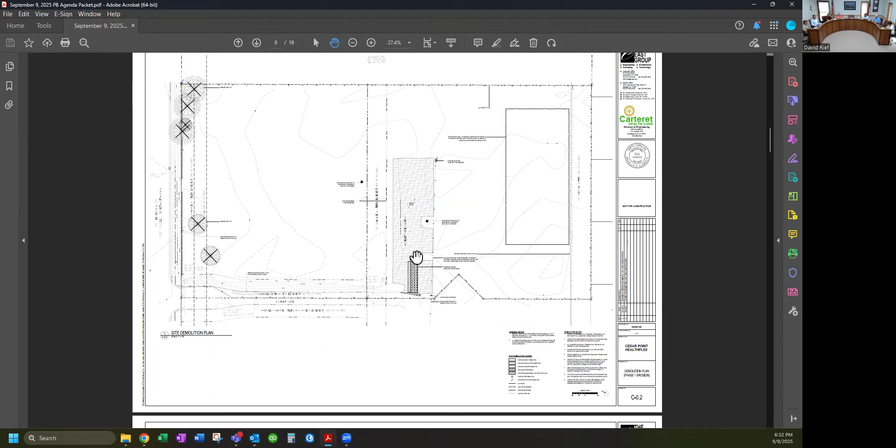Within your packet there are several pages to this site plan. The first is the demolition plan showing everything that needs to be taken out of the property. Much of this has already been done. If you've been by there recently, you'll know the trees are gone, and the whole parking area is gone, that sort of stuff.

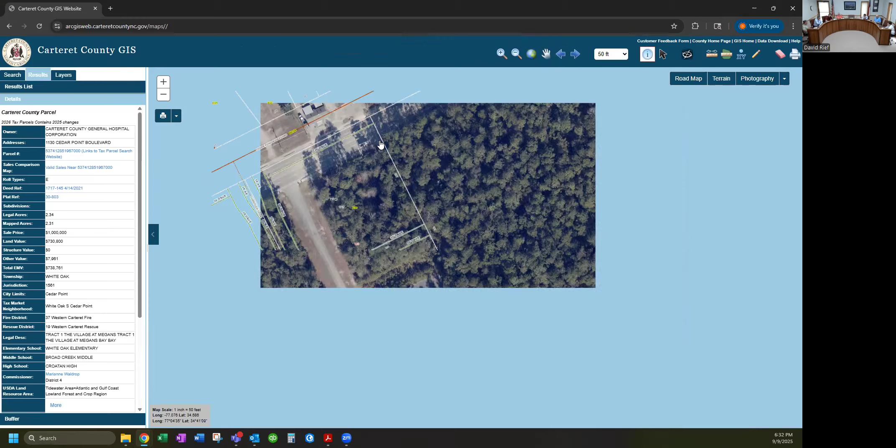The next sheet is basically a general layout of the site. Let me give you a little more context, just to make sure everybody's on the same page, and you might be watching the video at a later date. Let me set a little context here for you. I know all of you here know where it'll be located, but I want to make sure everybody can understand.

So this is Cedar Point Boulevard. Off to the left side of the screen here is AutoZone. The Town Hall we're sitting in is located right here. Across the road, kind of beside the condos, the Villas at Megan's Bay, encompassing these three tracts of land—this one and then these two behind it—for a total of approximately 5 acres.

So when we're looking at the site plan, we're looking at these three tracts combined together. The hospital does own this tract beside it, but there's no proposal you're looking at tonight to address anything on this tract over here. Everybody following? So it's these three tracts combined. But that has been cleared. It has been cleared, yes.

So we'll refer to this property jointly as 1130 Cedar Point Boulevard, even though there are addresses for 500 and 600 Lighthouse Lane back here. But the address will be 1130 Cedar Point Boulevard.

On this particular drawing, this is dealing more with your erosion control, your stormwater type stuff. You have some grading showing these parking spaces out front and along the back as being pervious surfaces, helping to reduce some of the impact from a stormwater standpoint.

Along the left-hand side of the screen is Highway 24, just to help get you oriented. Then down on the south side, the lower side of the screen, is Currituck Drive. Put that in perspective over here—Currituck's right here. The property to the west is currently still vacant, right there on the other side of Currituck. So that would be in this general area right here, with the condos being located back here.

Along the rear of the property are some single-family residential lots that are part of the Megan's Bay subdivision. I'll go on down here. This actually gives you the elevations for the grading, what those final grades would be, showing where the stormwater would be going. I can zoom in and show you a little bit more of those details here.

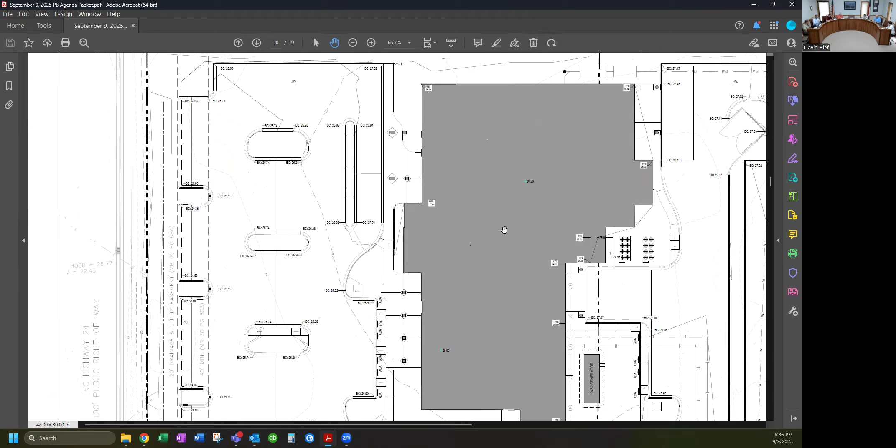So it looks like the bulk of the stormwater will be heading to the west side of the property. There appears to be a stormwater retention pond located here, as well as one on the front corner, and a little bit along this front of the property here. You'll notice that the grading actually drains things to these drop inlets on either side here, and then into these areas here.

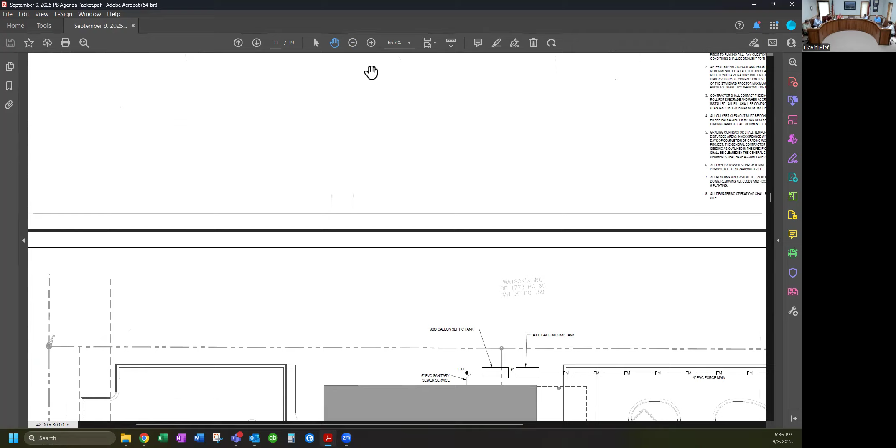Do any of these link into the drainage thing on the road? Yes, that's what I thought they did, but I just never. The state stormwater permits require a certain amount of retention on site. That used to be the first 1.5 inches in a 24-hour period, and I think it's still the same. After that, it can overflow into some other stormwater conveyance, such as a state DOT ditch. But the first 1.5 inches is generally the requirement.

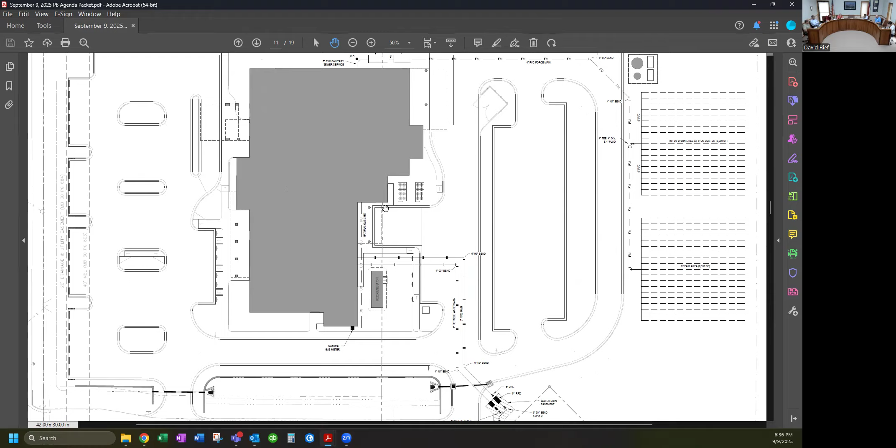One thing you see on this one is the layout of the location of the septic system. It'll be towards the rear of the property, and behind that there's a natural 30-foot buffer that's been maintained since they cleared the lot, so it's already in place. That was part of the PUD design when it was laid out to be commercial out front and condos in the back. They designed it with a 30-foot natural vegetative buffer to protect the single-family lots behind it, so that has been preserved by the hospital. I believe some of the residents might have done some clearing into that area previously, so there are some vacant spots in there now, but the hospital has taken no action to clear any of those trees out.

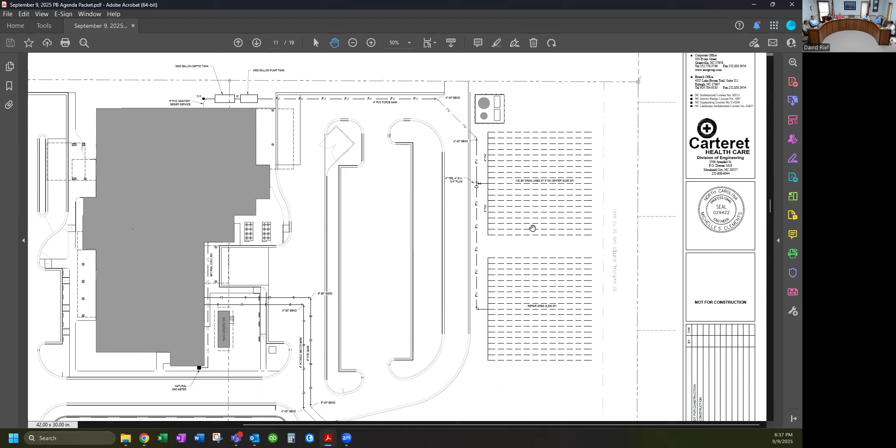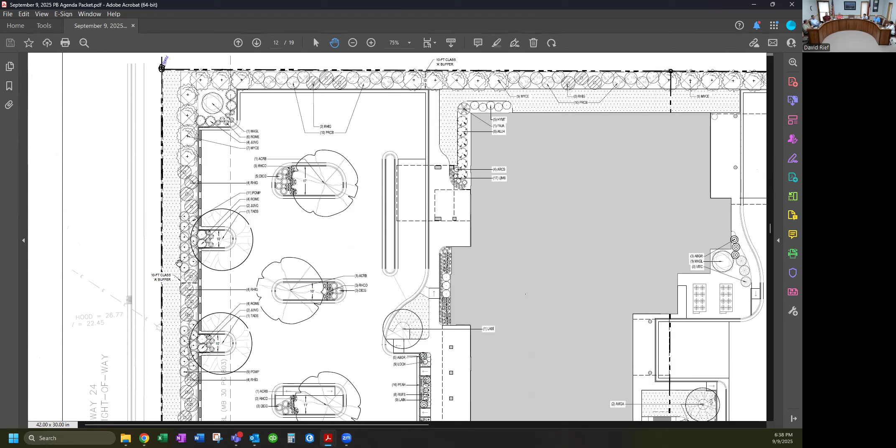It has to be a minimum of 15 feet in width. If I zoom in, this front area is actually 20 feet in width. They have all their plants in roughly 10 feet of it, with the front 10 feet being grass. If you look at our description of street yard landscaping, it includes grass as part of that, so it's not a problem for it to be grass. It does say at least 50% of it has to be trees and bushes, so of 15 feet, they're using 10 of it solidly for trees and bushes - that's 2/3 of it. So they're certainly meeting that requirement; we just need to change some of those bushes to trees.

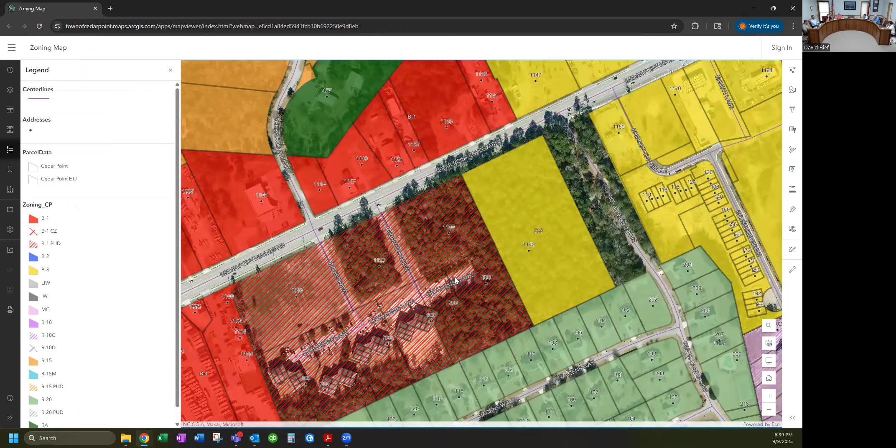There is a 10-foot wide Class A buffer along the east side of the property. Even though the hospital does own that tract of land, if you take a look at our zoning map - which I'm pulling up here on the screen - you see the three tracts here in the middle. To the east side of the property, it adjoins a B3 zoned parcel. So even though the hospital also owns it, it is zoned separately, and therefore they have to put that buffer in there, just in the event they decide to sell it or some other use goes in there. They still maintain the buffer to the right of that, going into the right-of-way of Megan's Bay.

To the right of that B3? Nothing is being addressed at this point on that side, but that's cleared, so they left - I believe they may have cleared all the way to the property line, I don't know for sure. I walked it today, it looked... but if you look here, all of this that's not shown in yellow is actually part of the right-of-way entrance to Megan's Bay. So I don't know to what extent they left anything on their side of that property line, but Megan's Bay has some wooded area.

I don't know, Kyle Merrick is the CEO of Carteret Health Care, he's here with us tonight. I don't know if he has the answer to that question. Not 100%, I'd have to go out and look at it.

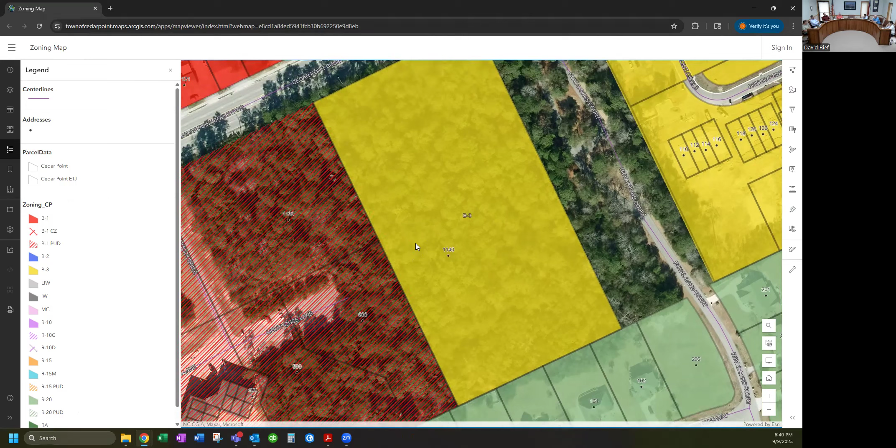Well, there's a buffer there, I just didn't know the distance, but it's not being developed yet. We'll have to take a look at that when and if they ever decide to move forward with something there - it'll be treated separately. But because they are zoned separately, that's why you have the requirement for the Class A buffer along that side, which is 10 foot.

Let's see, it gives you the schedule here. I do want to address one thing. Let me go back up to the chart.

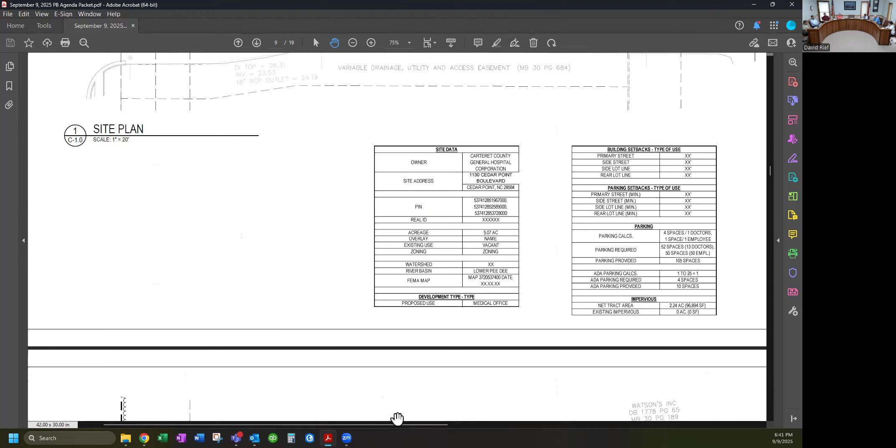One thing we always have to take a look at is the concern with parking. If you look at the parking chart, there's two ways you can look at parking under our ordinances, and this is one of those areas that could be in conflict. The parking requirements for a medical facility are greater than those for a hospital, because under our ordinances, the language for a hospital counts the number of inpatient beds to figure parking. This facility will not have any inpatient beds, so it wouldn't require parking for those, but it then has an additional amount based on the number of doctors. So the more restrictive here would be the medical facility, which is exactly what they followed for this project.

They're showing that 102 spaces would be required based on 13 doctors and 50 employees, because for a medical facility it requires 4 spaces per doctor plus 1 space per employee. So 102 required, and they're providing 105 spaces. They're also providing more ADA accessible parking spaces than required.

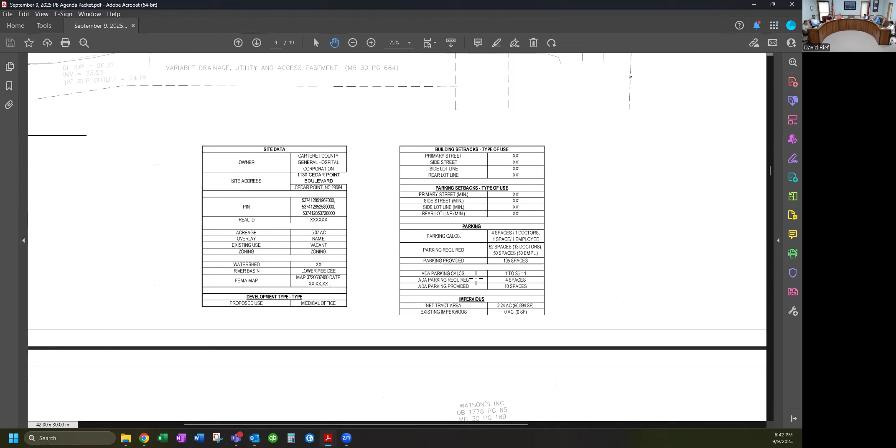So here's your general layout. My understanding is that the design is for the general public to use the front parking area, while the rear parking area would be reserved for employees and staff.

You do have a dumpster enclosure back here. It is shown to be screened, as required by ordinances.

Last month, to give you an update, the Board of Commissioners did approve the 2 text amendments that were recommended, including the language to limit it to emergency medical facilities. So the driveway location is not an issue, nor are the canopies on the front of the building.

Do you have a question?

Planting, back to the planting. I'm trying to picture the trees in the back where the staff parks. Is that road behind the trees or in front of the trees, the back road? In other words, are the trees between the road and the septic, or in?

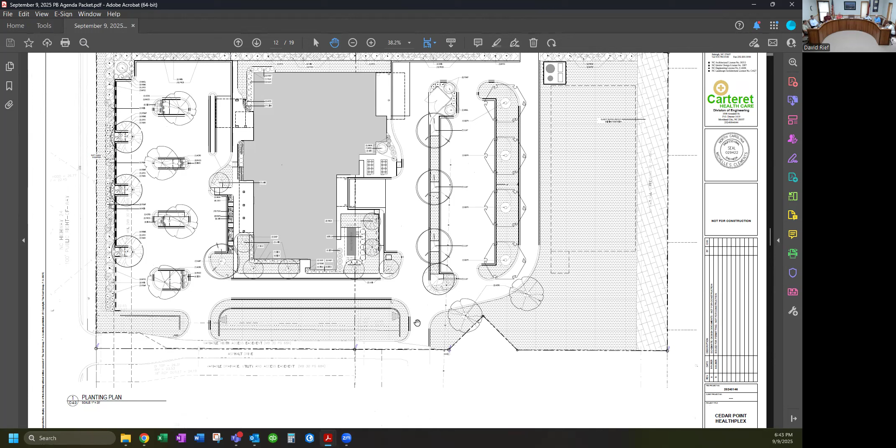So what you have here, there's a driveway entrance right here, which would line up with Lighthouse Lane, coming straight in. And then you have where an ambulance could pull in under the rear shelter, the rear canopy. And then you have parking located between these two sets of trees. Our ordinances also require interconnectivity between adjoining commercial properties, so this is a drive aisle that would allow future access into the adjoining property if necessary to meet that requirement.

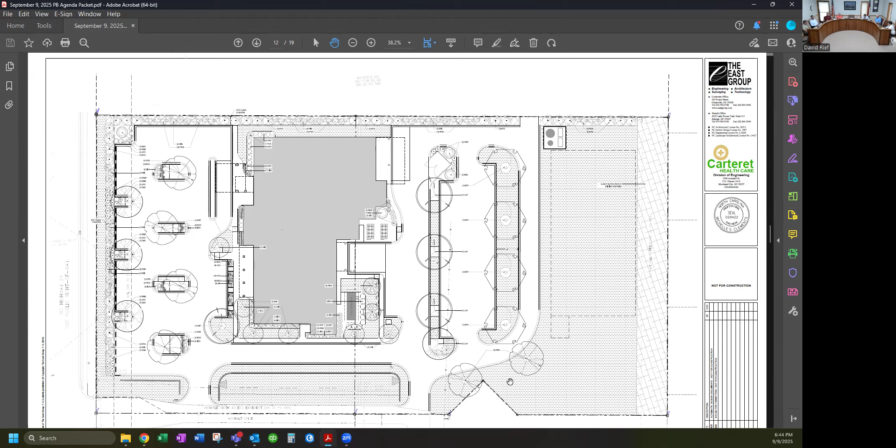So there would be a little bit of drive aisle. You may have traffic coming around the backside of that, but the parking itself is located here in the middle, as shown on your parking layout.

So there's all those parking spaces, and then you do have some parking up along the building itself. The ADA accessible parking spaces are here and on the front of the building right here. That's kind of an overview of it.

The only thing I noticed that doesn't quite conform to the ordinances is that issue of the landscaping, and the hospital has already indicated a willingness to fix that before getting final approval.

Well, nice to have public here. Let's open it up for any public comments. Those of you who are public—anybody? Okay, well then I'll start.

Brad? Good, Joe? One thing I didn't see in here—I don't know, I seem to recall most site plans include lighting, a lighting plan. That was a concern for some of the neighbors in Megan's Bay. I don't see that here. I don't know, is that a requirement for a site plan? But even if it's not, I think it would be beneficial for the Board of Commissioners to see the lighting plan.

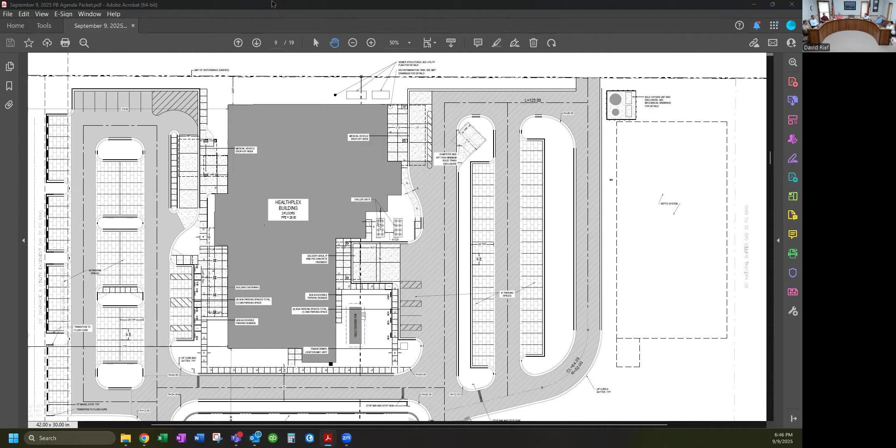And then the other thing—we saw renderings last month. There's not a building elevation. Or is there? So they did provide one, and the only question is probably building height, because that was another concern, how tall the building is. So let me pull up—Kyle, I might need you to address this. Has there been any changes to the elevation drawings since what was submitted the previous month? So there's no changes there.

As far as the height is concerned, we don't have that height. It hasn't been provided, but I do want to show you in our ordinances—getting to it on another screen here, so just bear with me a second. No, it's in the definition section.

So under our definitions, here's the definition of building height. For purposes of this ordinance, height of building shall be measured from the existing grade elevation prior to any land disturbing activities. Fill shall only be allowed under the restrictions. This tells us how building height shall be calculated.

And then under subsection C... where is it? Oh, here we go. Height limitations shall not apply to any grain elevators used in connection with a legally recognized bona fide farm operation, government buildings, schools, hospitals, water towers, public utilities, or similar structures, provided such structures meet the required North Carolina building codes.

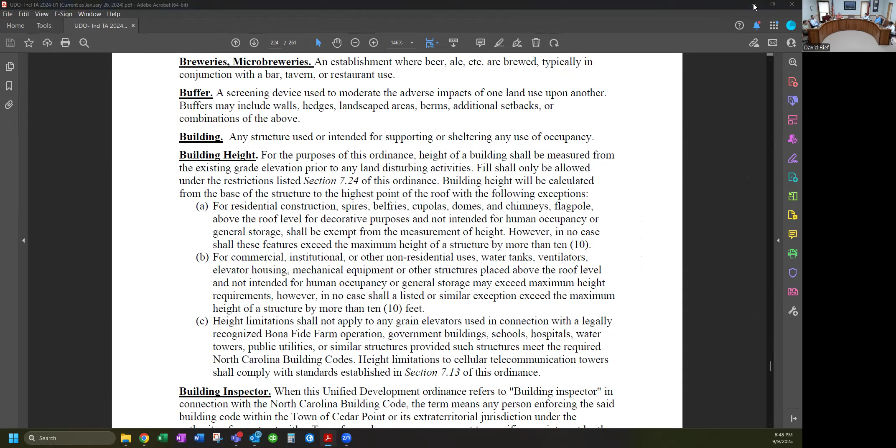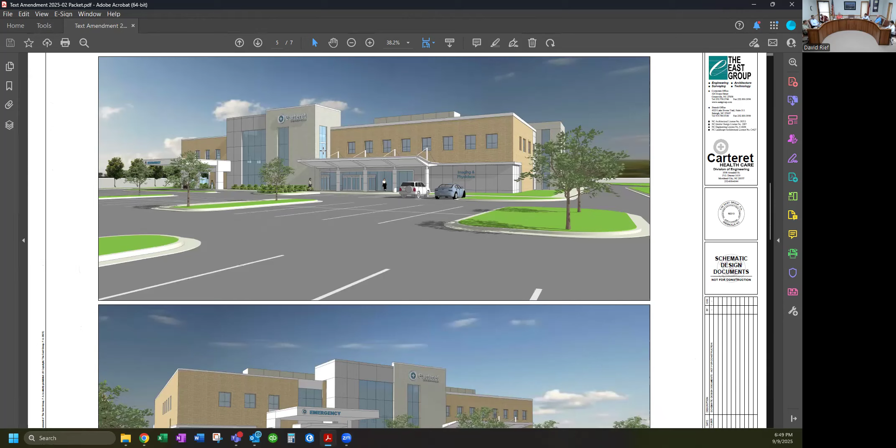I don't have any other questions.

No, Mike? Yes. So last month we had very good comments from Megan's Bay residents. I appreciated them coming out to help provide a perspective from their point of view, having to look at this building. But I've got several questions.

So it's Kyle, the CEO, correct? Yes, sir. So for you, why name the building Healthplex instead of a hospital? What's the technical difference in the definition? Because there's got to be a difference, and I'm curious what that is. So because there's not any inpatient beds, it's not deemed a hospital. So it's going to have multiple entities in there, both an MRI with Eastern Radiology, which is called CHO Imaging, and an ambulatory surgery center, which is strictly outpatient. No overnight stays. It's more or less the difference between state regulations and definitions and our ordinance definition.

I just want to make it clear so that we're not having our own assumptions in our minds. I appreciate that. Yes, sir. The clarification, a comment.

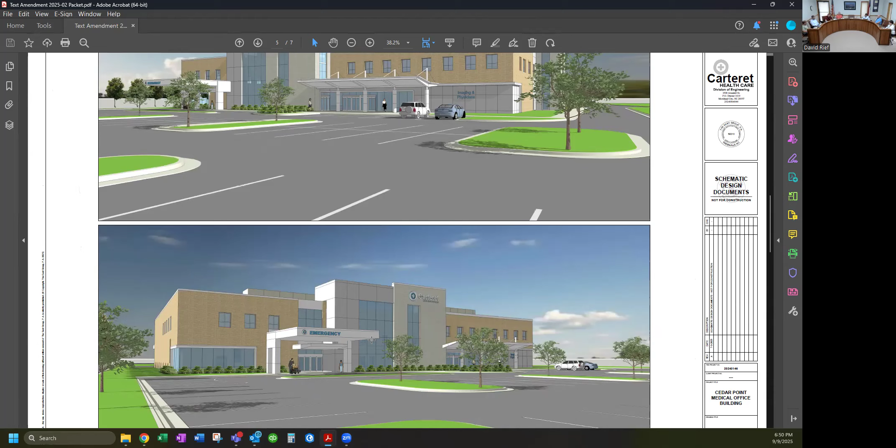I like the types of vegetation that is being proposed. I like the tree selections, because I am not a fan of Leyland cypresses. To me, that's a cop out when I see it being put in. It's just a general comment you've heard me say in the past about Leyland cypresses. When I hear them say Leyland cypresses, I laugh to myself.

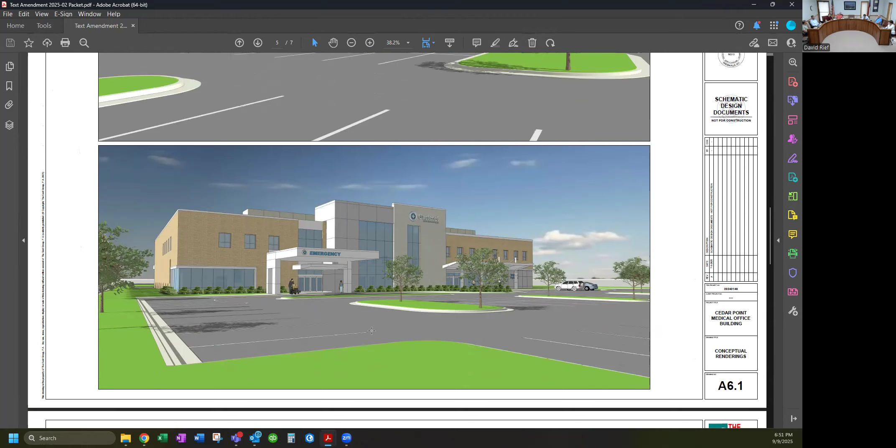So with the 30-foot vegetative barrier on the backside of the Healthplex, aligning up next to Megan's Bay - one of the comments from Megan's Bay residents was a fence. I don't see it depicted. When will that be depicted? Because that is something those residents want - a separate physical barrier, not just a vegetative barrier. What are your thoughts on that and feedback from them?

It's definitely something we can look into. It's not a definite no or anything like that. It's something we can consider. So they want a fence, it's just concern with that boundary. I share that with you. Have you heard the comments, or has David provided you with their feedback? Yes, sir. Okay.

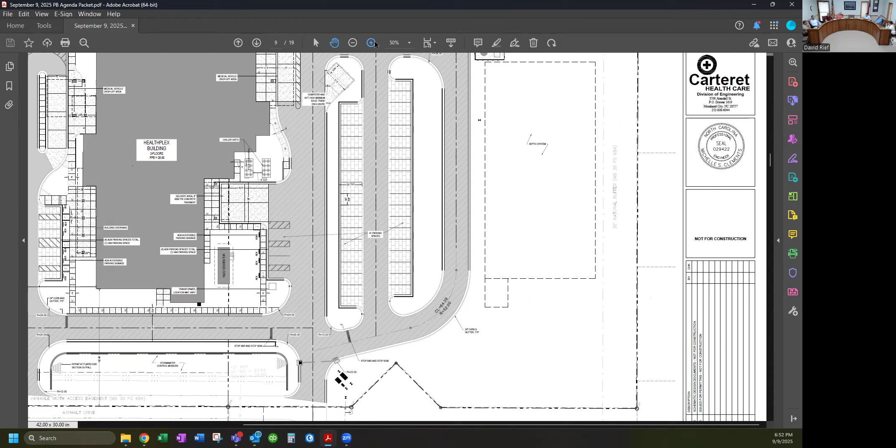David, thank you, because I always home in on parking lots, so you got my answer on that. I wrote down - 102 is required, but you're doing 105. Out of curiosity, what are the size of the spots? Are they 8 by 16 or 10 by 20? I'll zoom in here so you can see - here's your typical parking spaces, 10 by 20. Okay, so that's larger than I think what we have. That's good, especially for this area where people have a lot of full-size trucks.

David, what's the medical building across the street? Just out of curiosity, do you know the excess sewer capacity at that medical facility? Don't know offhand, I think it's a 15,000 gallon system, and they dedicated 7,500 to both units, but I'd have to double check that. Pretty sure you're spot on with that one. Because obviously you probably did research on tying into that. Yes, sir. The problem you run into is getting under the road becomes a big issue, a cost issue. It can be done, it's just a cost. Anything can be done with money.

So I see the fire department here. Thank you - my son volunteered there in his high school days.

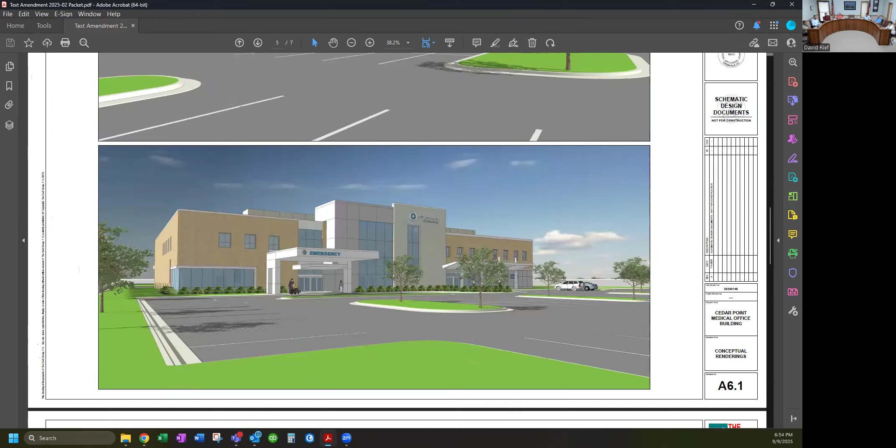Okay, yeah, because I just offered it up for, as you're finalizing plans, that they've got to be able to pull under it.

You'll pull it back, yeah, it won't have any problem. Yeah, but I'm looking at your high profile, the fire trucks. The fire truck itself, generally the rule of thumb will be pulling under, and distance away.

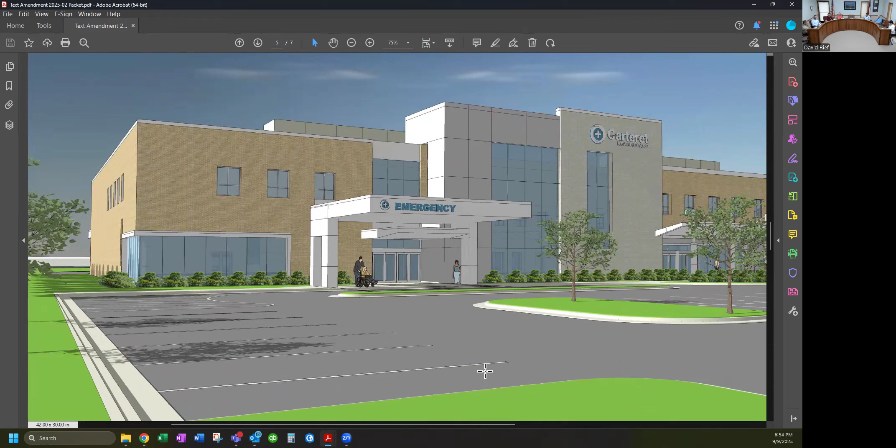Mr. Morello asked a good question, and then you pull it up, David, there's a carve out for hospitals with no height restriction. So hypothetically speaking, on the other 5 acres of land, a 5-story building could go in, hypothetically speaking. Hypothetically, yes, there is not currently any kind of carve out for footprint size or total square footage size.

So we do have that in place, a 50,000 square foot limitation in this area. It is within the central business overlay district. Okay, and then Kyle, so I guess it could be 5 stories, yeah, 10,000 square feet each.

How tall is the Morehead Hospital, just out of curiosity? I'd be all wet if I told you, I'll be honest with you. Yeah, because that's another comment Megan's Bay had. I mean, they're homing it at 40-foot, but now there's like, we see this little carve out there. So 3-story, 4-story, I mean, that's just an anomaly. I just highlight it for the board and stuff.

One thing I would point out with a concern about height is this is a 2-story building as opposed to what would have been 3-story condos located a lot closer. No, I'm homing in on the hypothetical on the 5 acre, just offering it up for awareness to the group, not focused on this building right here. There were at least 3 more sets of condos planned in there.

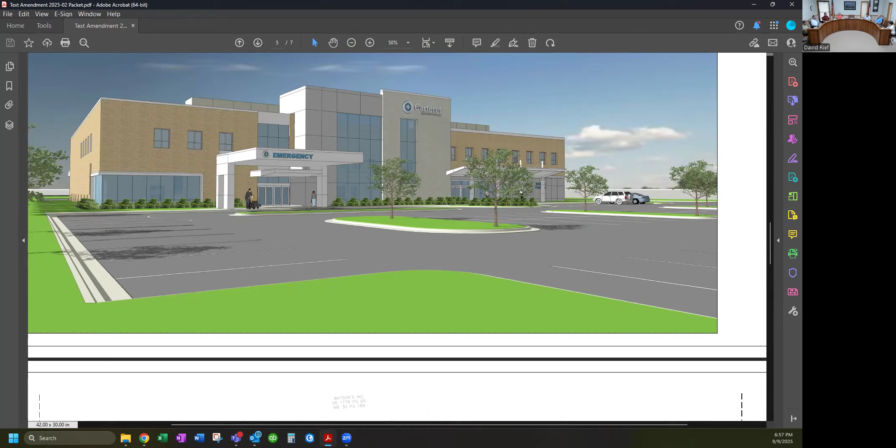Okay, so if there's security on staff and we have a 30-foot buffer and you gotta walk about 200 feet to get to Megan's Bay for some reason, what good's a fence gonna do? I'm not saying you don't need one. I would like to see, if not a fence, maybe some more trees put in there, but that 30-foot is pretty slim because it's been cleared out by people, I guess, over the years.

Because you're right, I mean, the residents were concerned about the security aspect. That's one of the reasons why they mentioned the fence on the backside, and I think they were mentioning along the entrance to Megan's Bay.

Then again, I don't know, to me, I can climb it. If I want to go there, I can get over it. You can't require something off-site just because it's owned by the same company. So that's my thing, I just want to see if there's security that might solve or help. I don't know, I'm just not a big fence guy, because how do you put it up there? If you can do trees and stuff, it looks better.

Get the lighting. Got the 30-foot wall, security issues. Get the fire department.

What do you see as the average delivery per day for the emergency department? Right now, based on our study, we estimate that after the 3rd year of being open, we'll see about 10,000 visits a year.

And how much of that would be ambulance deliveries, on average? It depends on the day, honestly, and the day and season.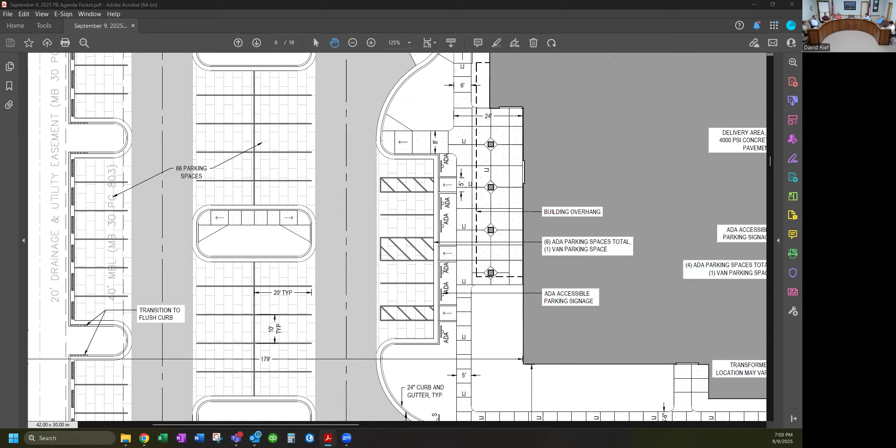It's not a requirement, we can't mandate it - it's a request, as community outreach, in good faith for your neighbors at Megan's Bay, to put a fence on the backside as a barrier between your property and theirs. That's my motion, along the south side of that property.

I second it. All in favor? Very good, it passes.

You didn't specify the kind of fence. Well, I don't know that we can. I know - was the vote unanimous? No. So who voted nay? You did, nay. Okay, so...

I've been in that battle over at the church before - it doesn't have to look at, yeah, a fence. Maybe they'll say we don't want a chain link fence, they're gonna want a solid fence. How do you do a solid fence with hurricanes? They're probably gonna want to combine - is shrubbery better as a barrier with the light discipline issue? Is it shrubbery? It's a sound barrier, but this has come up every time there's been a site proposal adjoining Megan's Bay.

And we're making a recommendation, that's all, a recommendation. Yeah, that's what I'm saying. Anything else? Comments on the board? Anybody in the public out there?

We're happy to see the building. Sure.